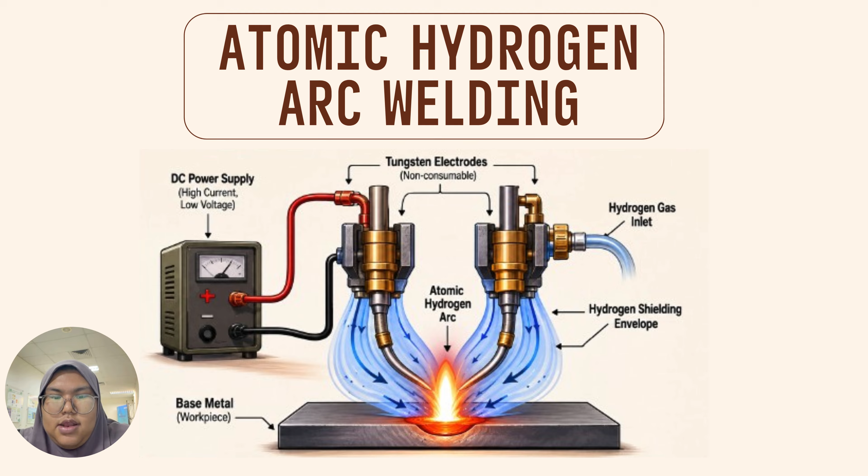Okay, so my name is TIBAN. Now I'm going to talk about the procedure of the atomic hydrogen arc method. We have 5 procedures. The first one is preparation, where we clean the base metal and set the tungsten electrodes with a small gap of 1 to 3 millimeters. Then start the hydrogen gas flow.

The second is arc initiation. Apply DC power. The arc is struck between the two tungsten electrodes in the hydrogen atmosphere. Next is arc stabilization. The arc dissociates hydrogen molecules into atomic hydrogen, forming a high temperature flame of around 4,000 degrees Celsius. The next is welding. Heat from the atomic hydrogen arc melts the base metal. Filler rod may be added if required.

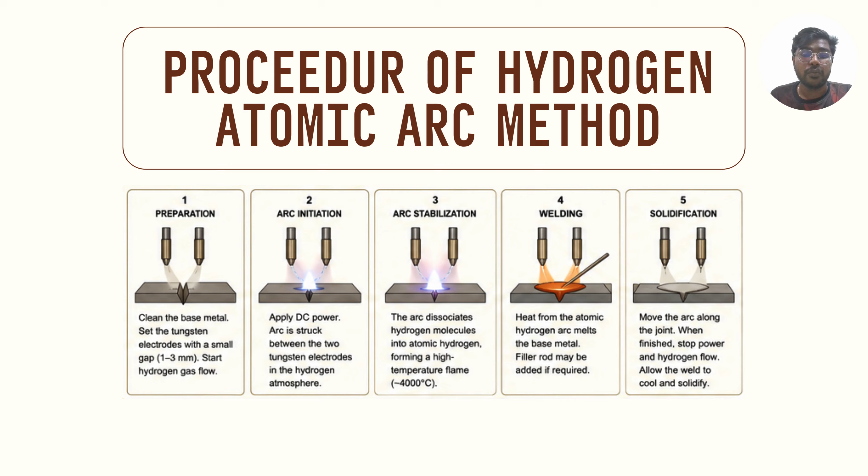The next is solidification. Move the arc along the joint. When finished, stop power and hydrogen flow. Allow the weld to cool and solidify.

As shown in this diagram, there are two tungsten electrodes connected with opposite polarity. The upper electrode is negative, while the lower electrode is positive. When the electric current passes between the two electrodes, an electric arc is created in the gap between them. Around this arc area, hydrogen gas is supplied continuously.

The purpose of the hydrogen gas is very important. When the arc temperature becomes extremely high, the hydrogen molecules split into atomic hydrogen. This process absorbs a large amount of energy. Then, when the atomic hydrogen comes into contact with the workpiece or a cooler surface, the atoms recombine into molecular hydrogen. During the recombination, the stored energy is released as intense heat. This produces a very high temperature flame, approximately 4,000 degrees Celsius.

In the center of the diagram, we can see the atomic hydrogen arc, also called a plasma. This plasma is the main heat source used in the welding process. Because of the extremely high temperature, the base metal melts quickly and forms a strong weld joint.

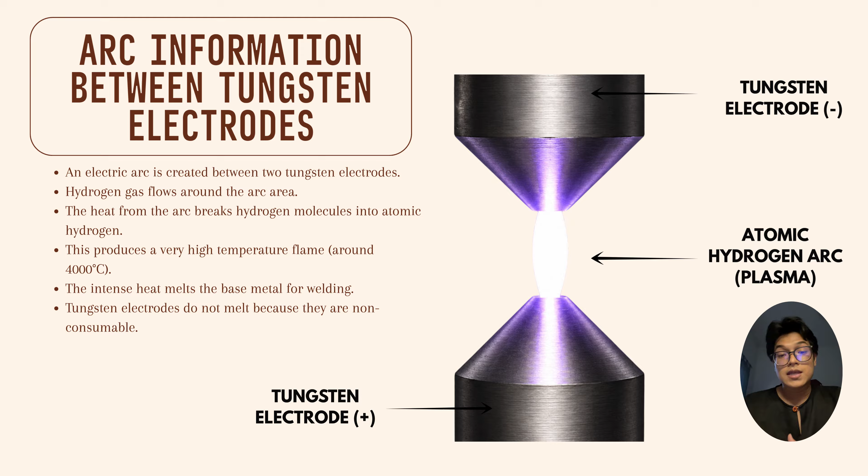One important advantage of this process is the use of a tungsten electrode. Tungsten has a very high melting point, which allows the electrode to withstand the extreme heat without melting easily. That is why the electrode is called a non-consumable electrode. Unlike other welding methods, the electrodes here mainly create the arc and are not used as a filler material.

Now I will explain the advantages and disadvantages of atomic hydrogen arc welding. First, let's look at the advantages. One major advantage of this welding technique is that it can produce very high temperature heat. The temperature generated is extremely high, which allows strong and deep welding on metal surfaces. Because of this, the weld joint becomes stronger and more durable.

Next, atomic hydrogen arc welding produces clean and high-quality welds. This happens because hydrogen gas acts as a protective shield around the welding area. It prevents contamination from air, oxygen, and moisture, which helps improve the quality of the weld.

Another advantage is that there is less contamination during welding. Since hydrogen works as a shielding gas, the weld area remains cleaner compared to some other welding methods. This makes the process suitable for precision welding work. In addition, this method is very suitable for welding stainless steel and high alloy steel. These materials require strong and clean welds, and atomic hydrogen arc welding can provide good welding performance for these metals.

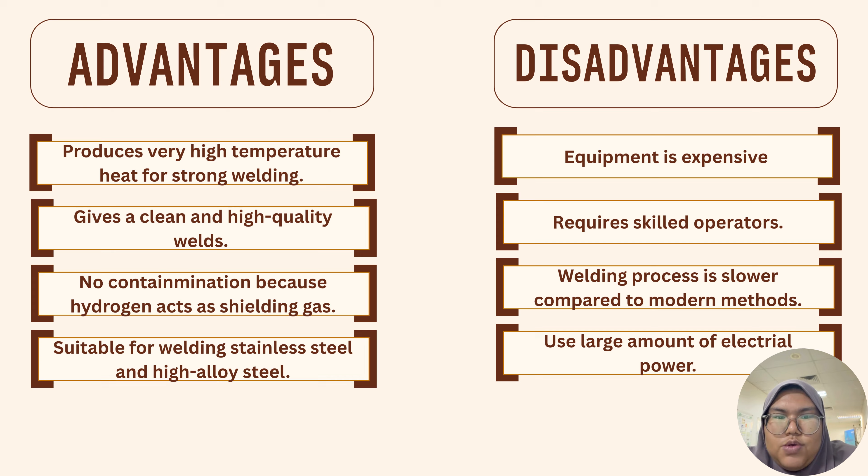Okay, now we are going to talk about welding electrodes. So welding electrodes consist of two parts. The first is the core wire, which is the metal, and the next part is coating. So the coating composition are fluxes, stabilizers, deoxidizers, binders, and alloying elements.

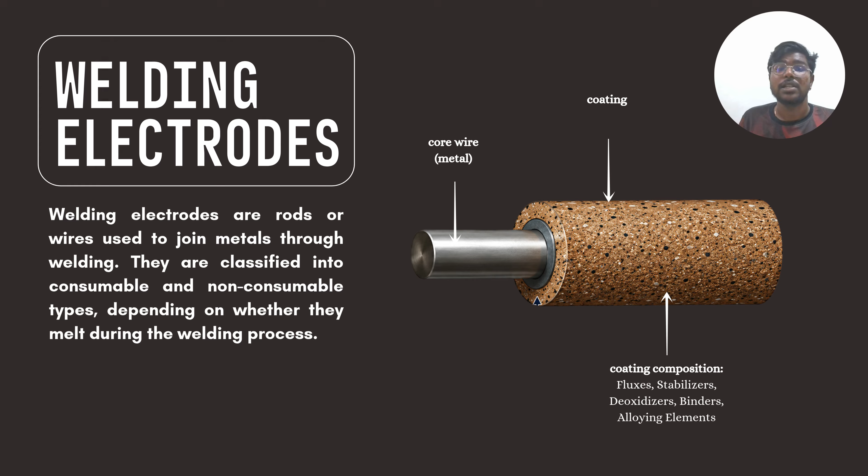So welding electrodes are rods or wires used to join metals through welding. They are classified into consumable and non-consumable types depending on whether they melt during the welding process.

So I'm Khaidir. So next we're going to talk about the type of welding electrodes. Looking at this slide, we can see that all welding electrodes are divided into two main branches. On the left we have consumable electrodes. These are electrodes that are consumed and melted during welding. And under this branch we have three types: SMAW, shielded metal arc welding.

This uses a coated metal rod where the arc forms between the electrode and the workpiece. It is widely used, versatile, and economical. Second is GMAW or MIG welding. This uses a solid wire electrode that is fed continuously through the gun. It requires shielding gas and is known for high productivity across many metals.

Next one is the FCAW, flux cored arc welding. This uses a tubular wire filled with flux. It works with or without shielding gas and performs well on thick material and outdoor conditions.

Now moving on to the right side of the slide, the non-consumable electrode. These are electrodes that are not consumed during welding. Two types. The first one is tungsten electrode, used in GTAW or TIG welding. Non-consumable, used with inert gas shielding and produces clean, high quality welds.

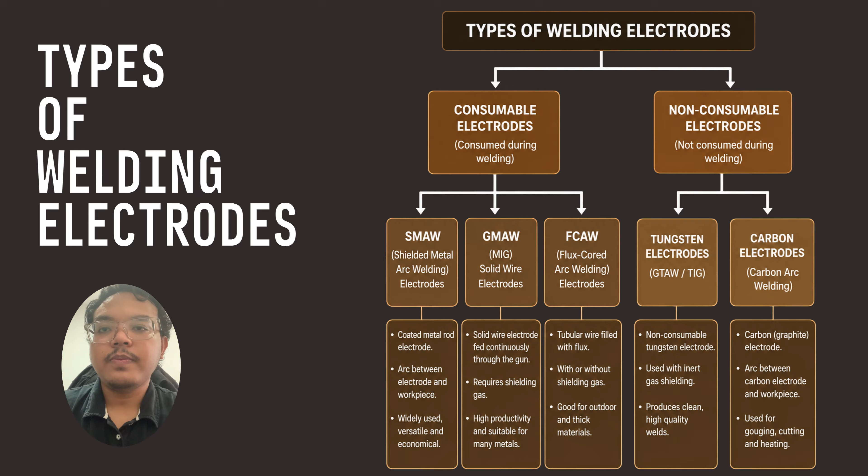Now let's look at the common types of welding electrodes, and this time we're going to go through each one visually, row by row in this table. As mentioned in the previous slide, welding electrodes are classified into consumable and non-consumable based on their function. Consumable electrodes melt and become part of the weld, while non-consumable electrodes only produce the arc without melting. Now let's look at each type.

At the first row, SMAW, looking at the image, you can see it is a coated metal rod. That coating is what provides the shielding during welding. The arc forms between this rod and your workpiece. Second row is GTAW or TIG. Notice how this electrode looks completely bare and smooth. That's because it is a tungsten electrode. It doesn't melt, it just creates the arc while inert gas protects the weld zone.

At row 3, GMAW or MIG, you can see this is a solid copper coated wire. It's fed continuously through the gun as you weld, which is what makes MIG welding so fast and efficient. At row 4, the FCAW, this one looks similar to MIG wire, but notice the difference. There is a tubular wire with flux inside. That internal flux is what provides shielding and creates the slag layer on the weld.

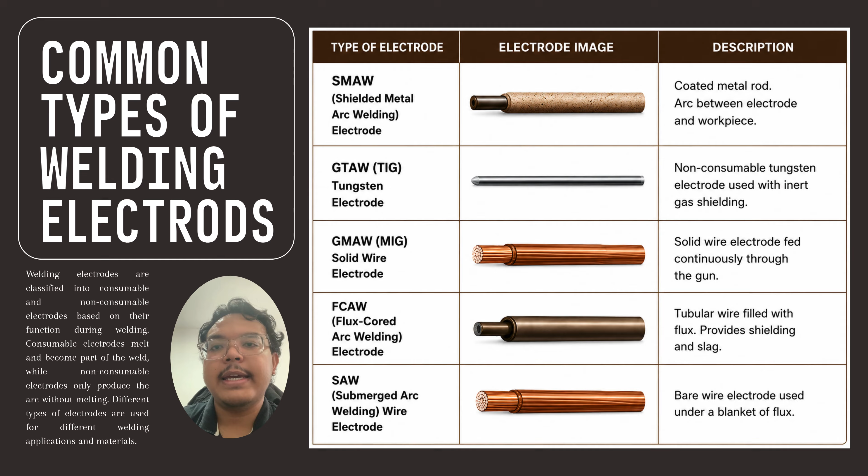At the last row, the SAW, this is also a bare wire like MIG, but it operates underneath a blanket of flux, which is why it's called submerged arc welding. That flux blanket covers the entire arc during welding. So looking at this table, each electrode has a different look and specific purpose. The more familiar you are with how they look, the easier it is to identify and use the right one on the job.

So this is the application of several arc welding processes. First is SMAW or stick welding. This welding method is commonly used in construction, repair and maintenance work because the equipment is simple, portable and suitable for outdoor use. Next is GTAW, also known as TIG welding. TIG welding is mainly used for thin metal, stainless steel and aluminium. It produces clean and precise welds, making it suitable for high quality and precision work.

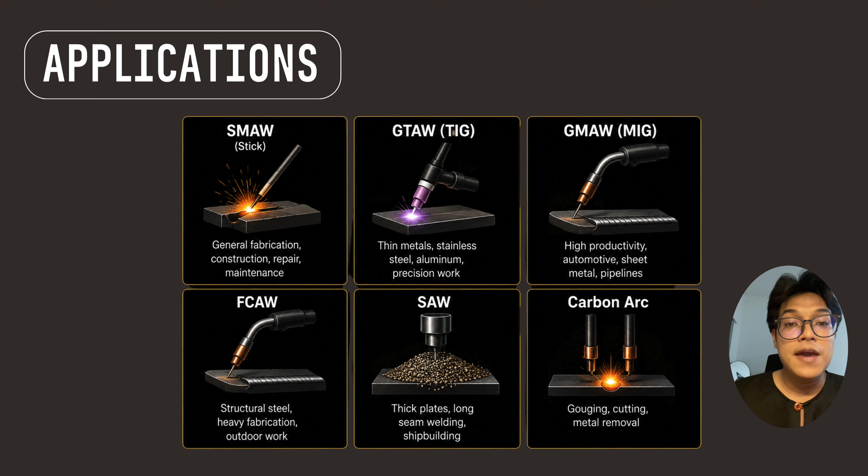The third process is GMAW or MIG welding. This method is widely used in the automotive industry, sheet metal fabrication and pipeline work because it offers high productivity and faster welding speed. Next is FCAW, which stands for flux cored arc welding. FCAW is commonly applied in structural steel work, heavy fabrication, and outdoor welding because it can perform well in harsh working conditions.

The fifth process is SAW or submerged arc welding. This process is suitable for welding thick plate and long seams, especially in shipbuilding and heavy industry. It provides a strong weld with deep penetration. Lastly, we have carbon arc welding. This method is mainly used for gouging, cutting, and metal removal applications rather than precision welding.

So in conclusion, different welding processes are selected based on the type of material, thickness, working environment, and production requirement. Each method has its own advantage and specific industrial application.